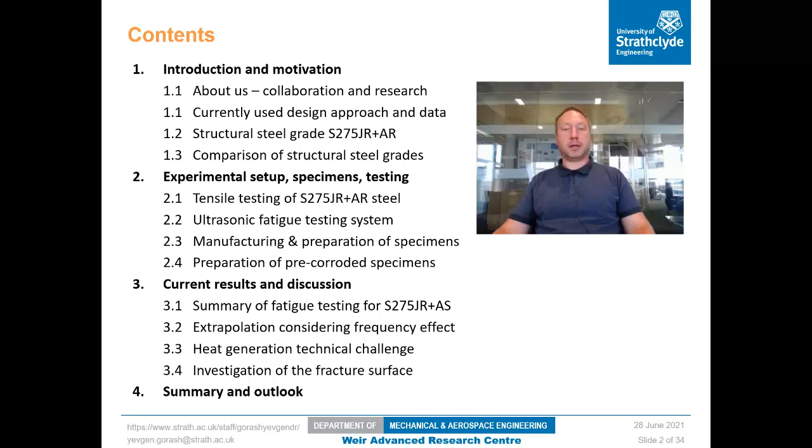Section 1: Introduction and motivation.

About us: we are the Advanced Research Center, a research hub established 10 years ago between Weir Group, headquartered in Glasgow, and University of Strathclyde, the oldest technical university in the United Kingdom. Over these 10 years we've been doing dozens of research projects annually. This year we are celebrating the 150th anniversary of Weir Group, which has transformed into a premium mining and technology provider helping its customers become more sustainable and efficient and deliver essential resources demanded by demographic trends and the fight against climate change.

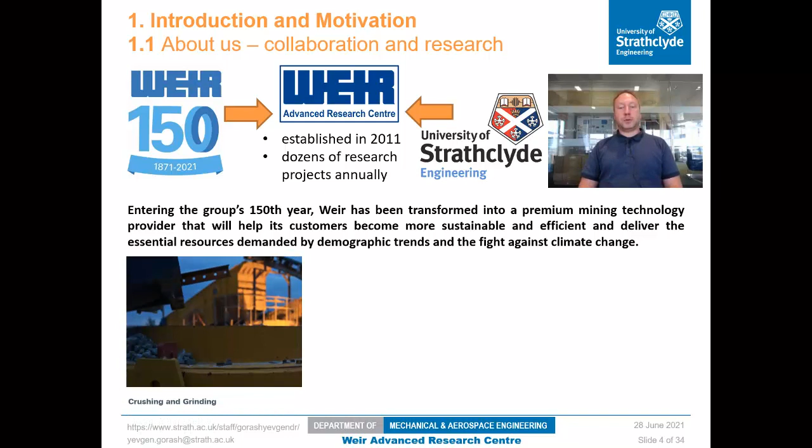So it's all about sustainability, reliability, and helping equipment last longer. The equipment we are focused on in this particular research is used for crushing and grinding, for classification and separation, and finally slurry transportation.

When looking at available fatigue data for structural steel grades, in most occasions it's limited to 10 million cycles. On rare occasions there is data available for over 10 million cycles, and even some extrapolations into the gigacycle fatigue domain. The only problem is that this data is quite generalized—available for the whole group of structural steels and doesn't distinguish between those with lower yield or higher ductility, and it's also generalized across different weld connection types.

Looking at these S-N curves closer, we notice they are extremely conservative because they guarantee 97% reliability. For example, looking at weld type W in its corroded condition, the stress range is limited to 10 megapascals, so we're talking about plus minus 5 megapascal operating range for this type of welded connection. This is of course extremely conservative, and this motivates our research to look at particular grades and subgrades in the gigacycle domain and investigate their real fatigue performance.

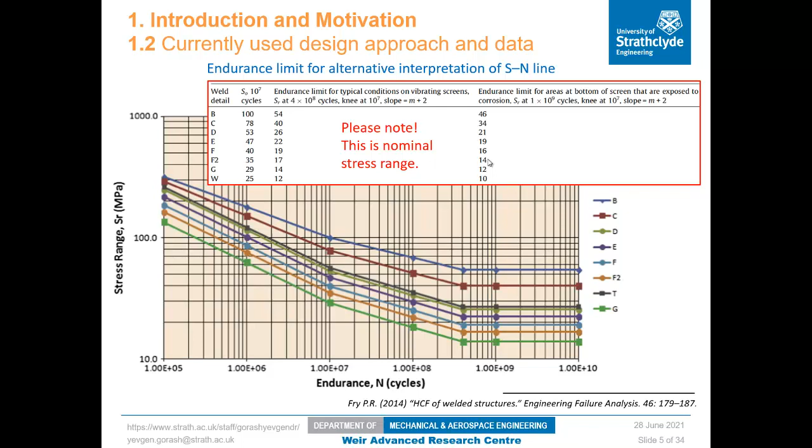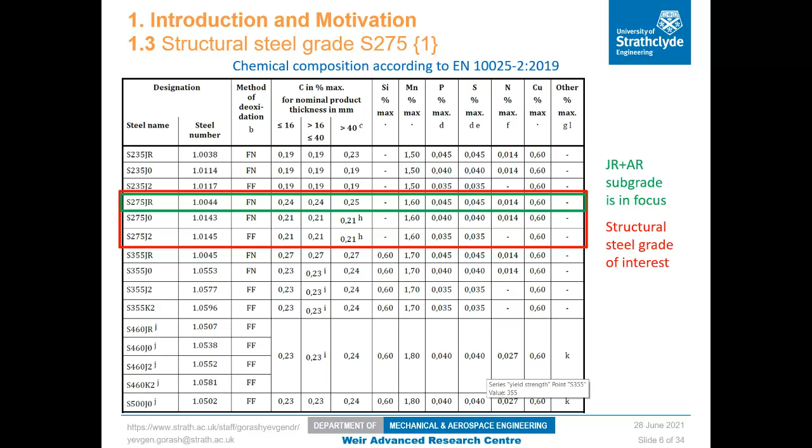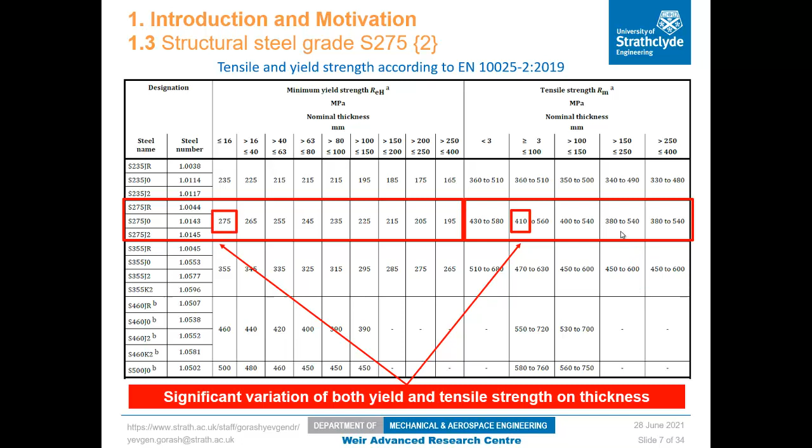In the focus of our research is grade S275JR as-rolled, according to European standard EN 10025-2. Looking at its mechanical properties, we see variation of yield and tensile strength, with typically 275 megapascals yield strength and 410 megapascals tensile strength expected. Looking at ductility, the minimum requirement is 23%, but in reality it's a bit higher.

When looking at the whole group of structural steel grades, including 235, 355, 460, and 500, this particular grade 275 sits closer to the ductile types of steel with low yield and tensile strength. This means we should expect higher crack tolerance.

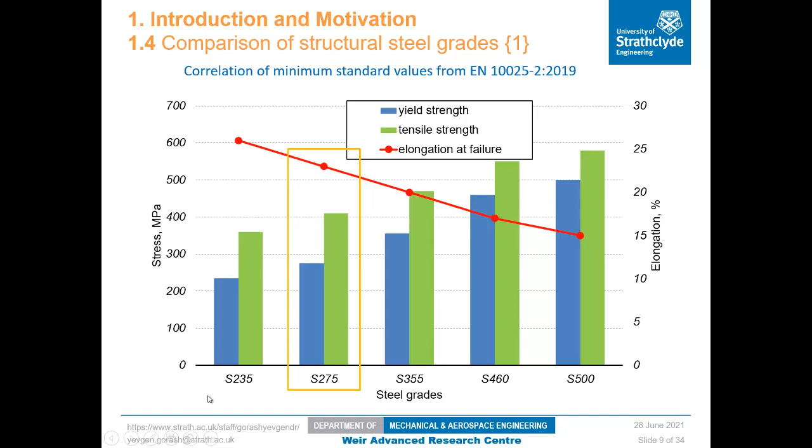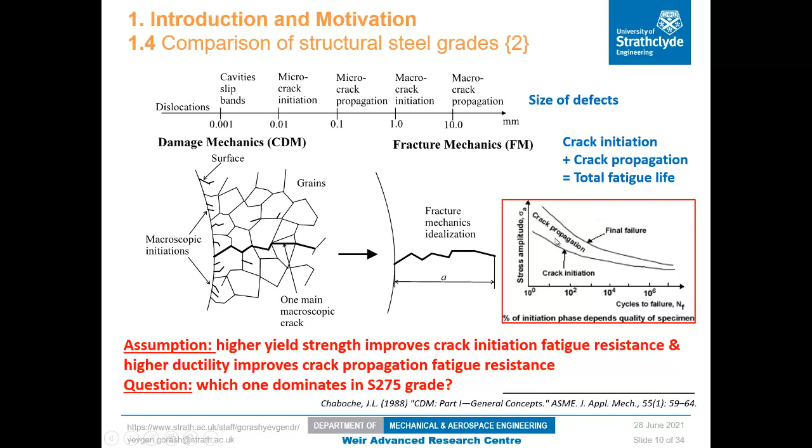The whole fatigue life splits into two phases: crack initiation, described by continuum damage mechanics, and crack propagation, described by fracture mechanics. The question is which phase dominates. We would expect crack propagation, but comprehensive testing needs to be done to address this question.

The plan was to study the fatigue performance of steel 275 using accelerated fatigue testing. Section 2 is fully devoted to experimental setup, preparation of samples, and testing itself. But first, a few words about tensile testing.

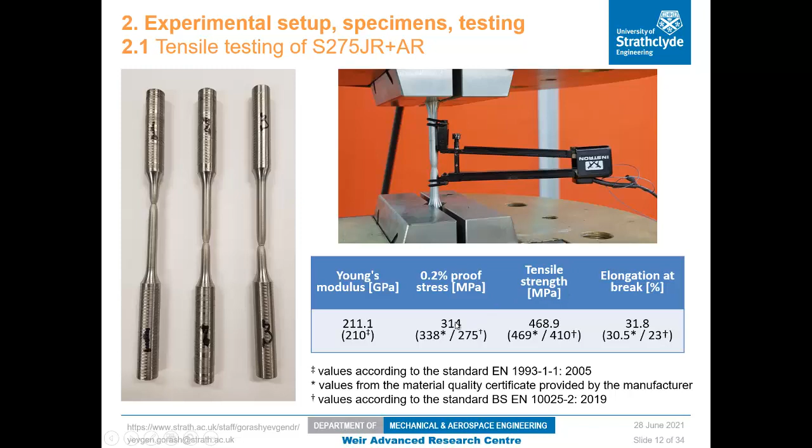Tensile testing was done using an Instron 8802 servo-hydraulic testing machine, and material properties such as Young's modulus, yield strength, UTS, and elongation at break obtained during testing were quite close to the values reported in the steel quality certificate. It should be noted that properties such as yield and tensile strength and elongation at break were much higher than those required by the standard. The central piece of equipment is the ultrasonic fatigue testing system VHCF8 from Shimadzu.

This particular arrangement also included a 5 kilonewton loading frame that allowed us to do fatigue testing at different R ratios.

The expectation was to reach 1 billion cycles in 14 hours, when at the same time you would need 1.6 years to get to that value at 20 Hz using conventional fatigue testing. Another impressive value: it would be possible to get to 10 billion cycles in 6 days, whereas the same would take years and years of fatigue testing at normal frequency.

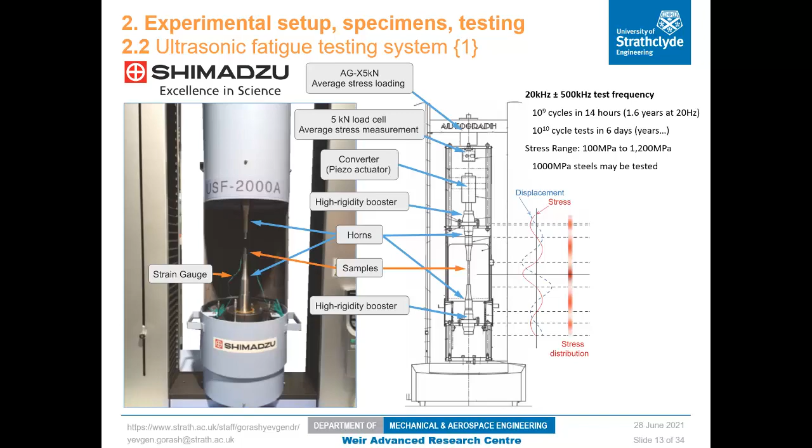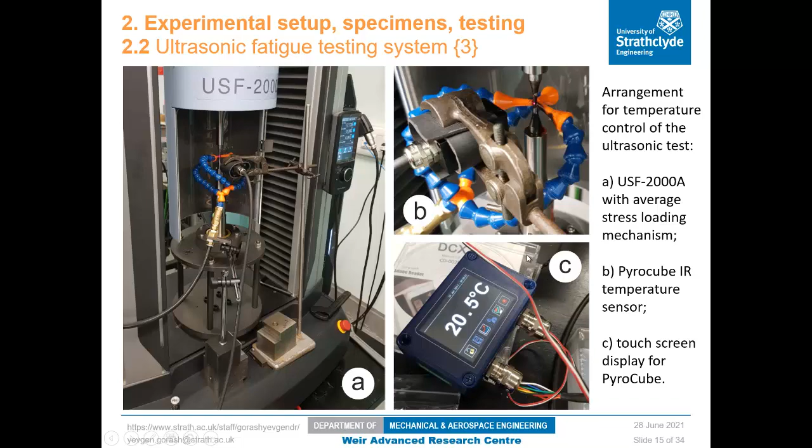The next challenge was the material that we tested, because reliable thermal control was paramount. The next central piece of this experimental arrangement is the thermal control measurement equipment. That consisted of the PyroCube infrared temperature sensor that was looking at the sample, and a touchscreen display for the PyroCube thermometer that could display temperature readings with the highest sampling rate of 1 second.

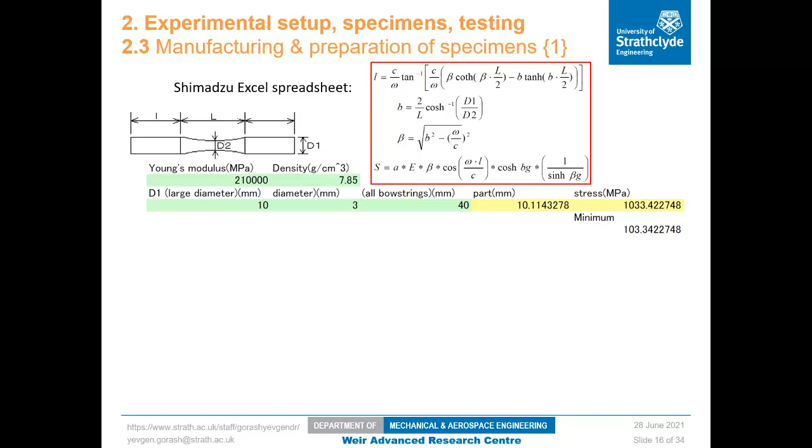Using the Excel spreadsheet provided by Shimadzu Japan and the material properties that we identified from our tensile testing, we managed to generate a correct geometry for the sample, so that the manufactured samples could resonate at 20 kHz.

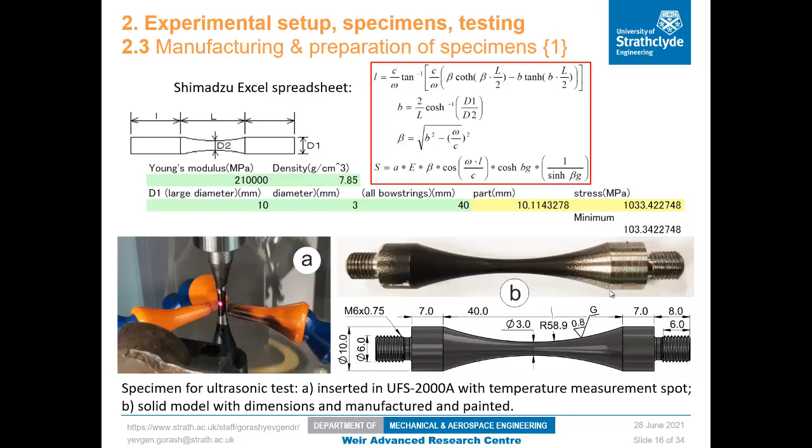Another important thing is that the shiny polished surface has very low emissivity, and that's why, to improve the emissivity and temperature readings, all the samples except those that are pre-corroded were painted with black matte paint.

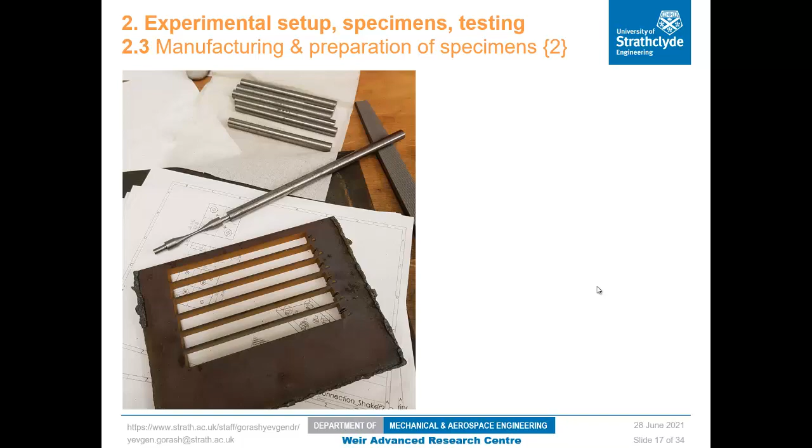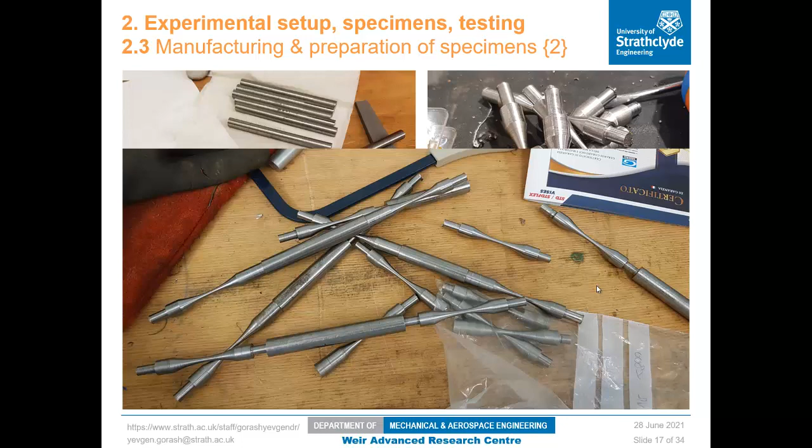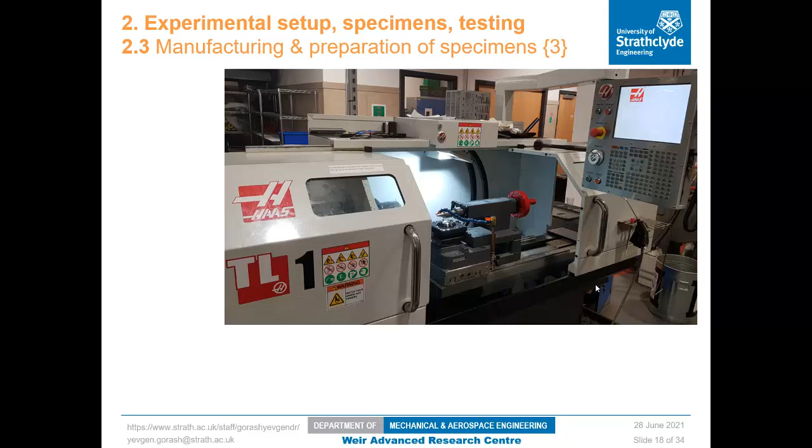All the samples for this testing program have been manufactured at our engineering faculty workshops with the help of our skillful technicians. With some amount of persistence, the learning went quite smoothly, and all the manufactured samples could vibrate very close to 20 kHz. Again, all the available equipment has been used, and the appropriate quality of the surface has been provided for the samples according to the standard.

Apart from the samples with ideal surface finish, there were also two batches of samples. They were pre-corroded in a standard 3.5% sodium chloride solution, submerged in water - the first batch for 2 weeks or 15 days, and the second batch for 1 month. After that, the samples were taken from the solution, cleaned from rust, and prepared for testing.

The good thing about these samples is that they didn't need any painting, because the emissivity of the surface was sufficient to get correct temperature readings, and also the heat generation was much lower than with the samples with ideal surface finish.

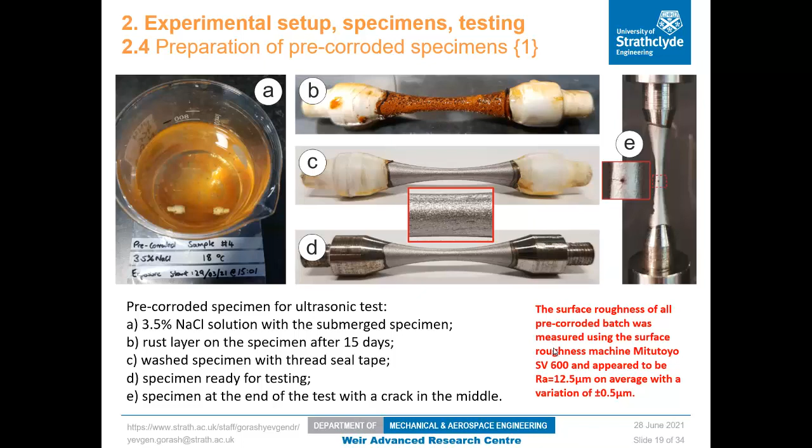The surface roughness was measured using a Mitutoyo profilometer, and the roughness for 2 weeks appeared to be 12.5 micrometers on average. Here is a little bit more detail about the second batch of samples.

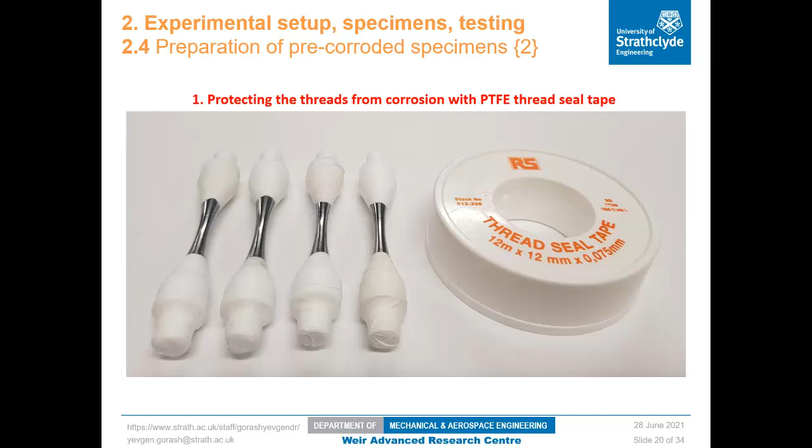It was important to protect the threads from corrosion, so they were wrapped in standard PTFE thread seal tape, which provided quite good and reliable protection. Then they were kept in a seawater solution for 1 month to get a heavier layer of corrosion.

When comparing the second batch with the first batch, the 1 month of corrosion with weekly washing resulted in deeper pits, as seen in this photo, with a roughness of 15.5 micrometers against 12.5 for 2 weeks of corrosion. So these two batches of samples also produced different fatigue testing results.

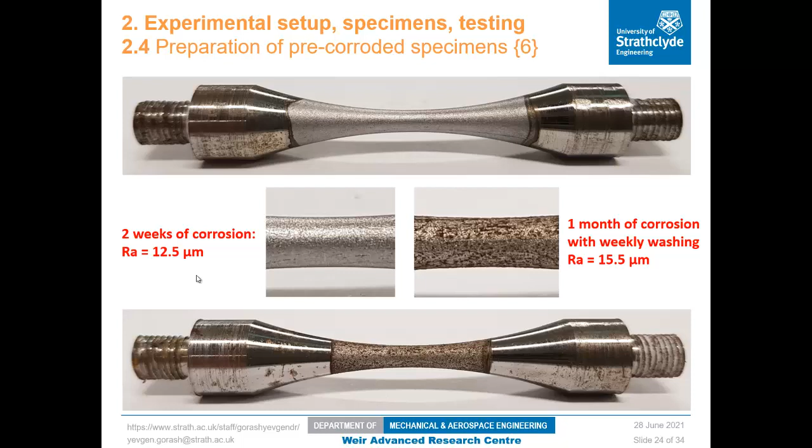So the next section tells about the obtained fatigue results. Section 3: current results and their discussion. This diagram briefly represents our expectation before we started this fatigue testing program.

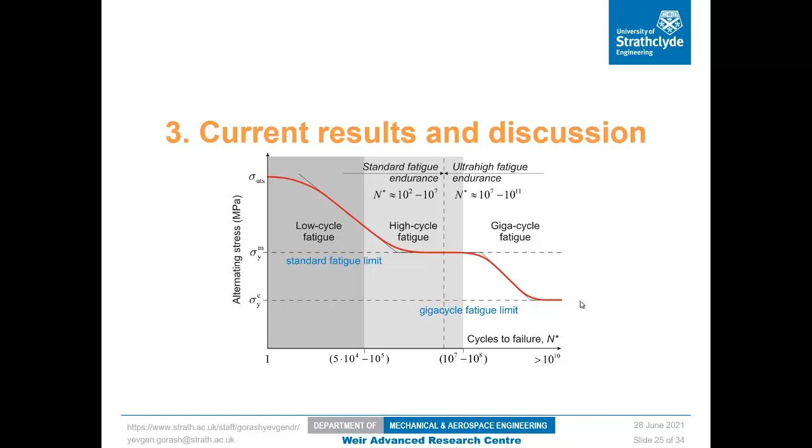We were going to find a high cycle fatigue domain with the standard fatigue limit, and a gigacycle fatigue domain with a different slope and maybe a gigacycle fatigue limit. But the reality for this particular type of steel appeared to be quite different.

This slide represents the summary of all obtained fatigue testing results, so I'd like to stay on it a little longer. The first group I'd like to draw your attention to are the samples tested at 20 kHz. Red triangles are the samples where the crack originated from the surface, and red squares are the samples where the crack originated from subsurface.

There is an obvious fatigue limit for this group of the data, which is found around 350 megapascals.

The next group of samples are two batches of pre-corroded samples. Red diamonds are the samples pre-corroded for 2 weeks, and yellow diamonds are pre-corroded for 1 month. There is a significant drop in fatigue life in terms of stress and number of cycles. However, there is one run-out sample for 2 weeks, but no run-out and no fatigue limit for the group corroded for 1 month.

The next group are data points obtained at low frequency of 15 Hz. The purpose of this data is to investigate the effect of frequency. This has been done by finding the difference between the data obtained at 20 kHz and the data obtained at 15 Hz, and this difference in average is roughly 170 megapascals. That's the green line.

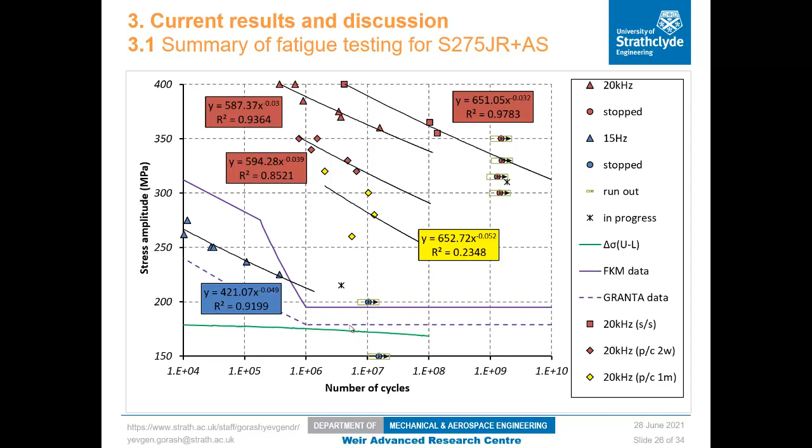FKM fatigue data collection predicts the fatigue limit at roughly 190 megapascals, and the fatigue limit from our data set is around 175 megapascals, which is quite a good prediction. I should add that the actual fatigue limit found for this data set is around 200 megapascals. So the suggested frequency correction is slightly conservative, but this is quite good.

This basic frequency effect correction has been applied to the pre-corroded batches in the same way, using the difference in stress of 170 megapascals. First, there was an extrapolation made to reach 10 billion cycles for both batches, giving values of 242 megapascals and 197 megapascals correspondingly. Then when the correction was applied, the stress dropped to 67 megapascals for 2 weeks pre-corrosion, and for 1 month of pre-corrosion it dropped to 23 megapascals, which is actually quite low and conservative.

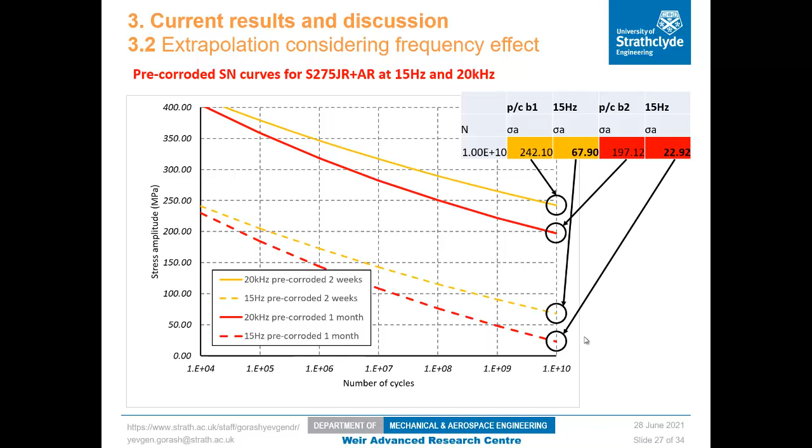The biggest technical challenge in this research was the heat generation in this steel grade. The heat generation was so big that it's better to show an example. The highest stress amplitude these samples were tested at was 400 megapascals, and this is one of the samples that lasted for almost 4 million cycles.

Test conditions were such that the loading block was 0.1 second and the cooling pause was 5 seconds. Cooling took 50 times longer than the loading block itself. With this regimen, it was possible to keep the temperature in the room temperature range for half of the sample life, but then temperature exceeded 30 degrees and peaked over 200 degrees just before failure.

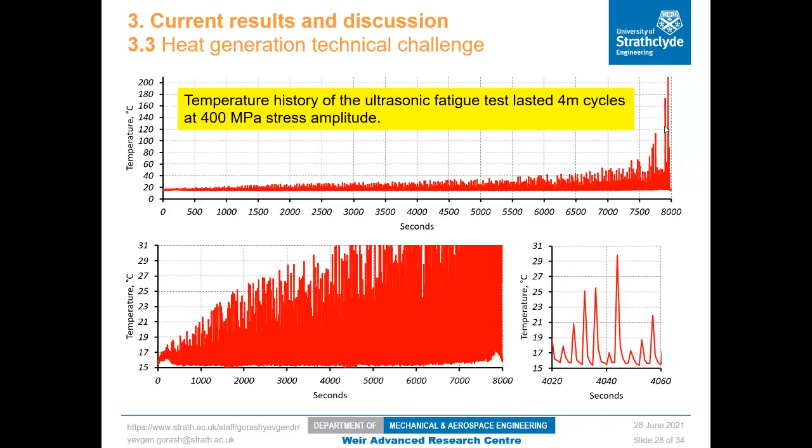It's also worth mentioning that the fracture surfaces of the failed samples were investigated visually and using two types of microscopy: optical microscopy and scanning electron microscopy. With the help of these methods, it was possible to find the origin of cracks.

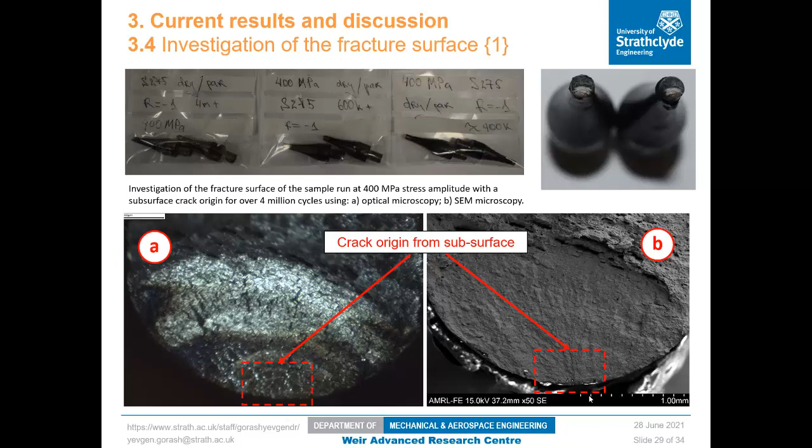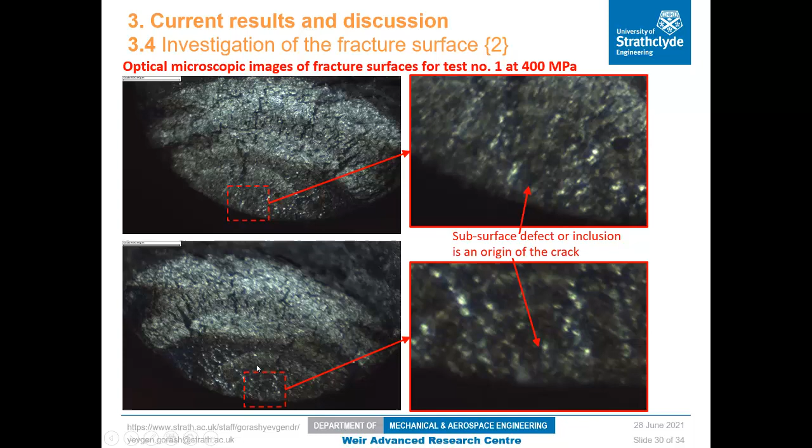The obvious advantage of optical microscopy is the coloring of the fracture surface that helps track the crack growing path to its origin. The obvious disadvantage is the lack of focus and lack of resolution.

The advantage of scanning electron microscopy is perfect resolution, extremely high definition, and extremely high level of detail. However, the coloring is ignored. But with the combination of both methods, it's possible to identify the origin of the crack with quite high accuracy.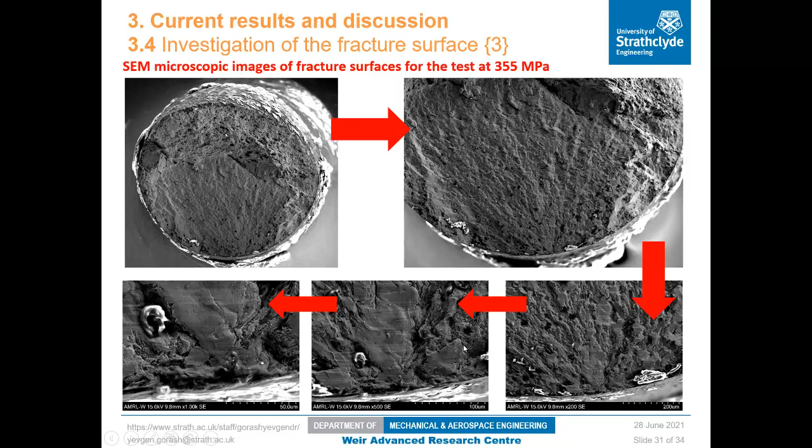Parent, dry parent, and pre-corroded condition of S275JR+AR grade have been investigated. The confidence and competence in running ultrasonic fatigue tests has been obtained. The duration of the fatigue tests has been limited so far to 1 billion cycles, but preparation to achieve 10 billion cycles is now in progress.

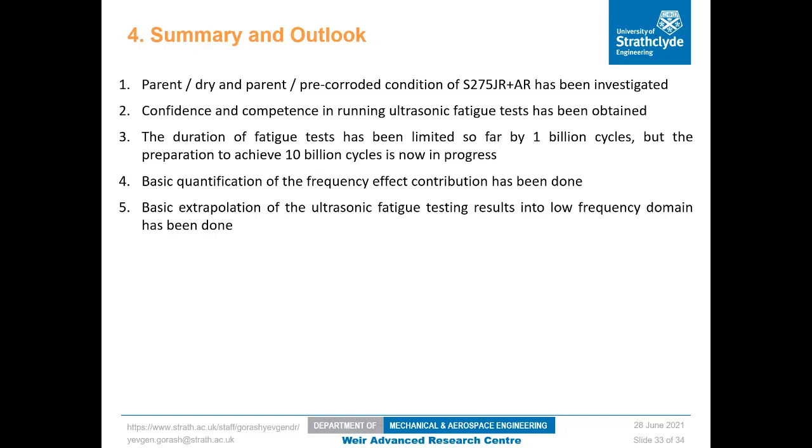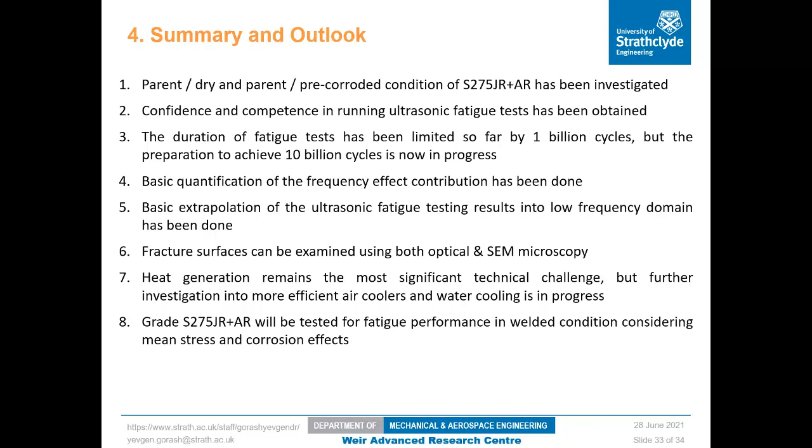Basic quantification of the frequency effect contribution has been done. Basic extrapolation of ultrasonic fatigue testing results into the low frequency domain has also been done. Fracture surfaces can be examined using both optical and scanning electron microscopy. Heat generation remains the most significant technical challenge, but further investigation into more efficient air coolers and water cooling is in progress.

Grade S275 will be tested for fatigue performance in welded condition, considering mean stress effect and corrosion effects. Deep investigation of the frequency effect in ultrasonic fatigue testing applied to structural steels is planned as the purpose of a new PhD project starting next year.